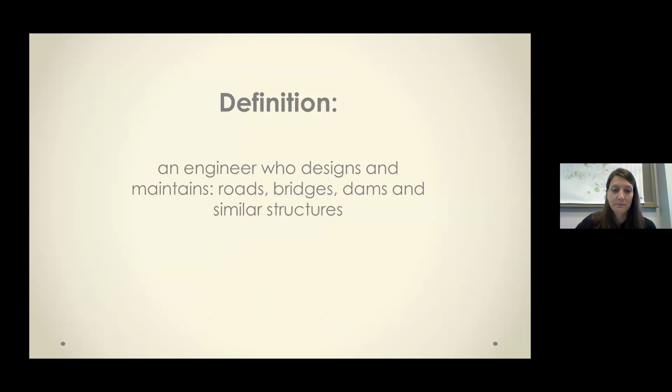I wanted to share a few pictures of common things we address here in Iowa City. These are some of our roads. We deal with small alleys behind apartments and residential houses up to state highways. We have Highway 1 that runs through town. We have asphalt roadways, and at the top you can see an issue created just the other day.

with all the heavy rains, there's a joint that was blown out with that asphalt road connecting to a bridge deck. The bridge will be replaced in about 2 years, so we're now trying to figure out how to repair that asphalt pavement so it'll stand up to more rain before we can replace the bridge.

We have brick roads in Iowa City. They're part of our history. If we do any projects or utility repairs in the area, those roadways have to go back in as brick, which is always an added element of excitement.

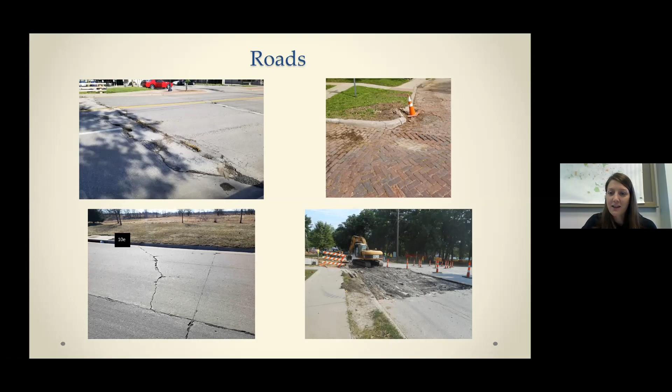At the bottom, our most common roadway is concrete. They withstand the freeze-thaw action with water. We have extreme cold and hot temperatures here in Iowa, so as that water freezes and thaws, it gets under our roadways and cracks them. There's an example of a 5-year-old roadway with some pretty significant cracks, and a picture of some panels being removed with the construction barriers everyone loves to see. I think that's what civil engineers are best known for.

Here are some bridges in town. We have a lot of old bridges over the creeks and tributaries running to the Iowa River that are currently being replaced and rehabbed. The top picture is a new one. Some of our main focus during new bridge reconstruction is considering pedestrians and trails. A lot of the old bridges don't even have a sidewalk on them, so maintaining that connectivity as well as dealing with the roadway issues.

Trails, the bottom bridge is a pedestrian trail. They're being heavily used right now in our social distancing state. We have many miles of trails and many pedestrian bridges. This is an example of one over I-80. We do coordinate with the State Department of Transportation quite a bit for our facilities adjacent to their roadway.

The next picture is a bridge that was recently removed just last week. It's being replaced this summer. You can see with the increased rainfall we're experiencing, a lot of water gets backed up and carries debris with it, so there's a lot of maintenance with the old bridges. We coordinate with our street staff, who have equipment to get down in there and clean it out. But we're coordinating to get a lot of these bridges replaced to create a better situation for our creek crossings.

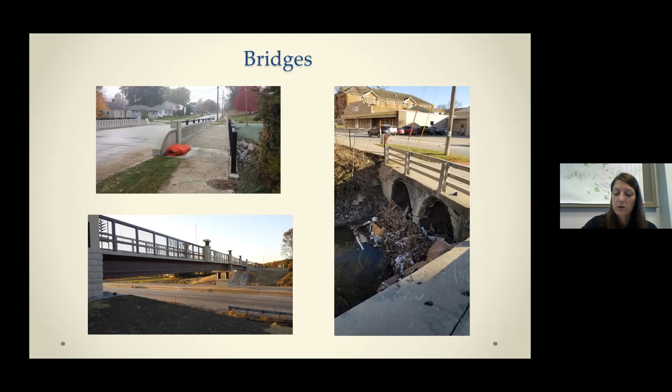Part of my job that people don't see is the design of underground utilities. Not all of them are underground, though. The top one on the right is a water main that's hung from a bridge. We sometimes go under the river or creek, and sometimes we insulate a utility and hang it from the side of a bridge. There are challenges with both. The bottom photo is storm sewer, typically concrete, and this was just delivered to the site prior to installation.

And then the larger picture is a 30-foot deep sanitary sewer that we constructed as part of the Dubuque Street project. Phasing and traffic control was one of the biggest issues with that project—how to install deep sewers, how to elevate the roadway while maintaining traffic.

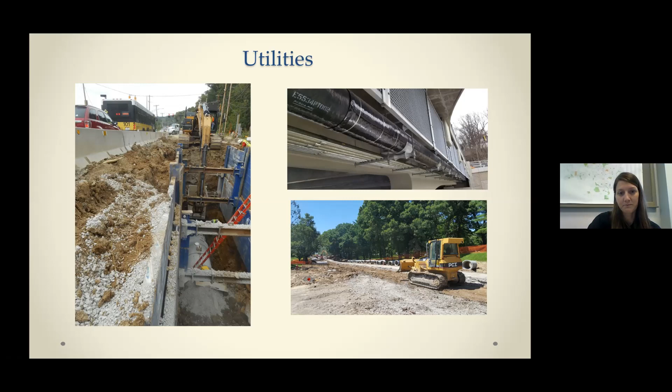You can see a bus right there next to our big hole that we dug. These are some of the special things that I get to deal with.

We have a new public works building where we store all of our city vehicles and equipment. I don't know much about truck and car washes or fuel facilities, but I help facilitate those being constructed here in Iowa City.

We've done some cabin restorations. We have 100-year-old cabins up in City Park that we worked on drainage and provided sidewalk access to so the public can use them. And we have a lot of new playgrounds going in and being installed.

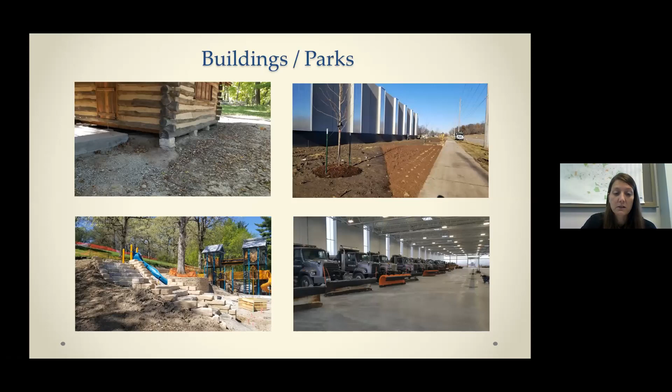So you'd think that was Parks and Rec, but there are different walls, stairs, shelters, sidewalk elements, and drainage features that need to be designed and inspected during construction by a civil engineer.

So when I was brought on at the City of Iowa City, we had just experienced the 2008 flooding. These are pictures of Dubuque Street before construction and the Park Road Bridge.

2008 was the first time the Park Road Bridge had been overtopped by floodwaters. And the bottom two pictures show something that happens even now in different parts of Iowa City.

Local roadways get heavy rains. If we would get an inch of rain in an hour, our roadway would flood. This is North Dubuque Street.

So we deal with stormwater capacity. If we can't put it right into the river because the river's flooding, where else do we put it? Where can we look to provide storage? A lot of our wetlands have been taken up by development.

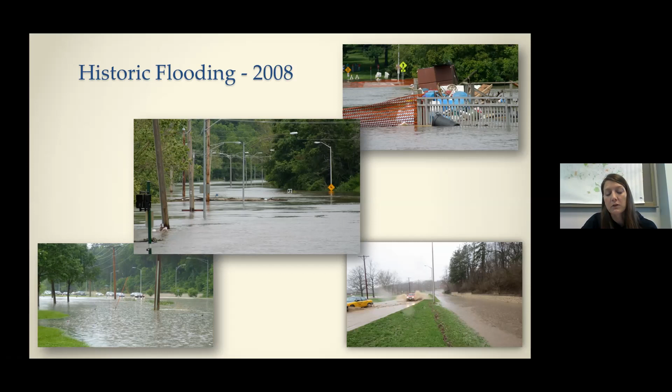So everyone's kind of taking a step back in the industry right now to look at areas close to our larger watersheds and look to where we can store our rainfall. This is a good aerial view of the flooding that occurred in the corridor.

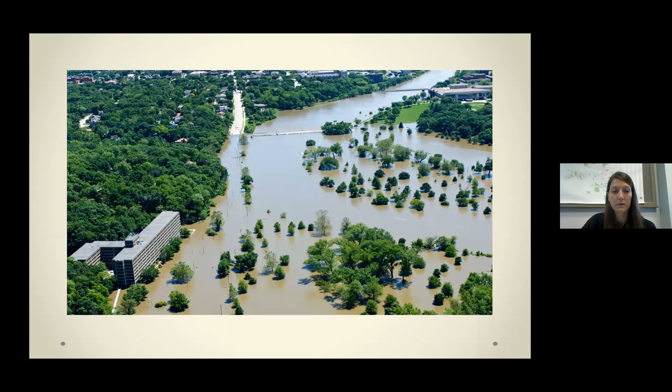And here again is the finished product. So one of the things I enjoy most about my job is I don't deal with just one element of the profession. So when I first started here, I met with design consultants.

I think we met with three or four different firms, and we interviewed them to see who was most fit to design the project. After that, we went through the planning process.

We had to look at all sorts of environmental factors, look at the number of lanes on the roadway, and how the traffic signals would be designed.

We worked with a bridge architect and the structural engineer. The structural engineer is also used to design the wall elements that help to elevate the road.

So I think the number of design teams involved in this project is more than we would typically see, but it was very enjoyable to see all of those come together in one single project.

So with my job, I can work on a project like this, or currently I'm working on a little storm sewer project—storm sewer through a park, maybe a little bit of landscaping once it's covered up and finished. And I don't work with anyone.

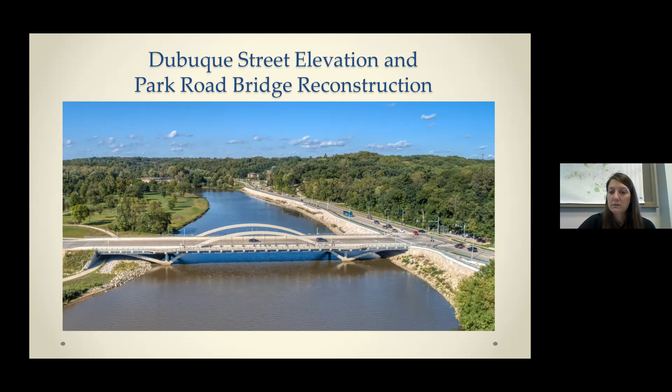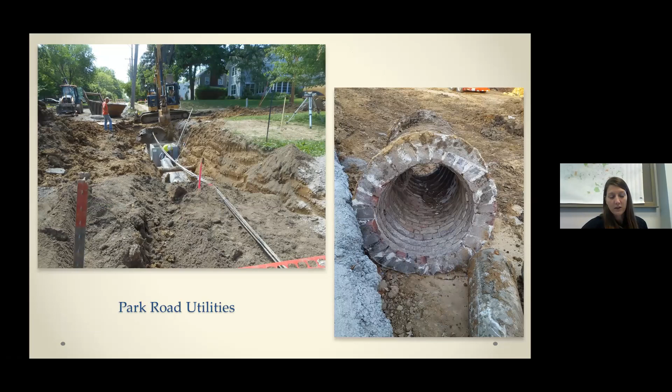This was the design of Dubuque Street, how we maintained traffic, how we elevated it at the same time. We did two lanes at a time.

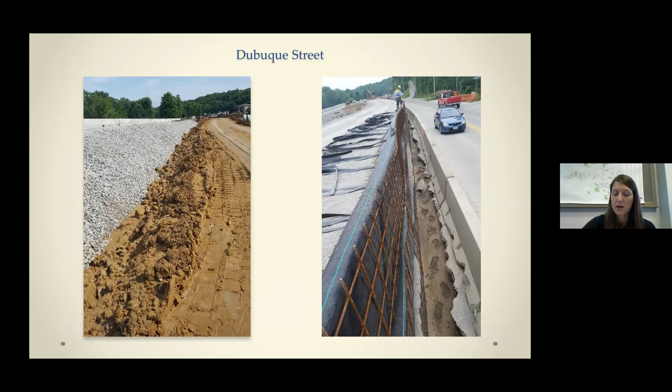And this was the Park Road Bridge. It was constructed from the river. We built a structure to build the bridge from, which sounds a little backwards.

But we designed it south of the existing bridge to maintain traffic, and then we introduced traffic to the new bridge and demolished the old one.

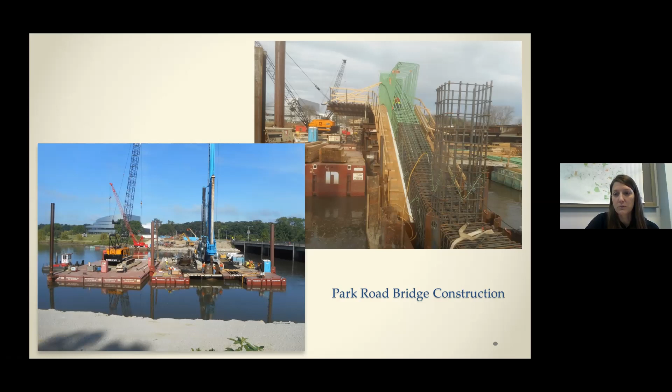So I was down in sanitary sewers while it was being constructed, and I was up on top of the bridge arch.

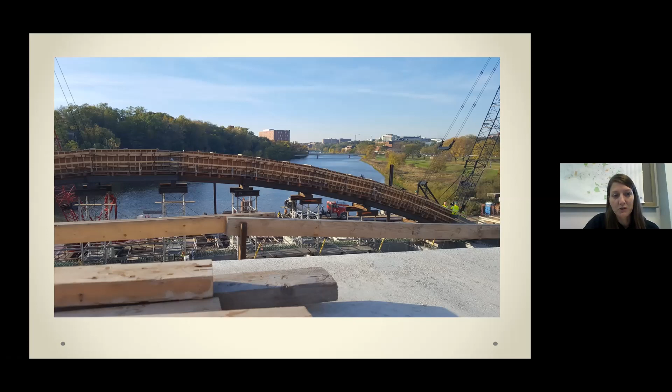So those are examples of my projects. You can see that civil engineering is really all around you. It's not only the roadways and bridges that you can see, but it's the water main underground that provides clean drinking water when you turn on your faucet. Wastewater treatment, when you flush your toilet, you don't really want to know where it goes, but we take care of that as well. Stormwater drainage, I talked about with the flooding. Sidewalks and trails is huge. More people are out on trails now than ever before, and just having that connectivity to surrounding communities is even more important.

So that'll kind of lead into my discussion with where I entered into civil engineering. I've always been very concerned about the environment, so I wanted to study clean water. Environmental engineering also deals with air and air quality as well, and pollution. So that had been my goal going into college, was to come out with a specialty in environmental engineering.

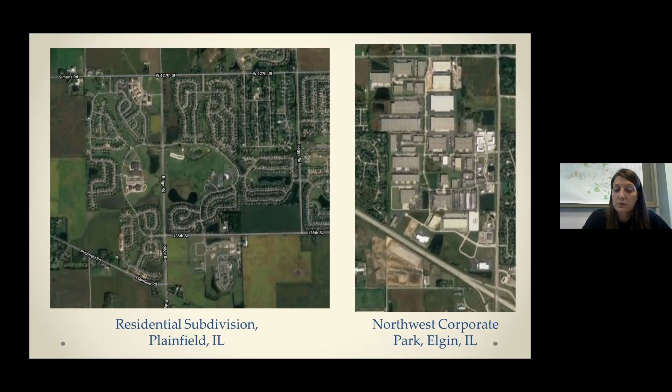These are just aerials. I worked on residential developments and industrial developments. I specialized in storm sewer and detention basins. So in a number of these, you can see the little spots. The one on the left was a 100-acre subdivision. So we would come in and do the roadways, utilities, storm drainage, make sure it was ready for the home builder, who is our client, to come in and start building homes for people.

I also worked in commercial development and would work on office buildings and different campuses. I spent 10 years in Chicago before moving to Iowa, and I also worked in Boulder, Colorado. So I know people in the profession who have worked overseas. You can pretty much go anywhere as a civil engineer.

If you want to be a civil engineer, it's definitely possible to still enjoy life to the fullest and stay busy and happy in your career. So with that, I hope you consider a field in engineering. And if you have any questions, don't hesitate to get in contact with me, and I can answer some questions. Thank you.